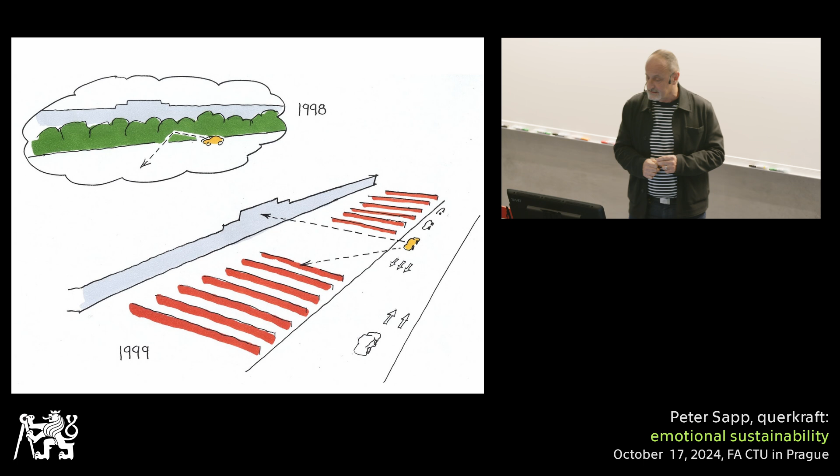At that time the foreground of the Museumsquartier had bushes and trees, and we thought it wasn't a good idea to make a competition for the facade, because no one would see it. So we cut away the bushes and made this little installation of 10,000 square meters, to show that in future it's a good place for different things at the Museumsquartier—exhibitions and all these things. So the Museumsquartier, which is very rigid, can go outside. It was a very cheap and very temporary measure.

In the end, there wasn't enough money to hire a company to remove these things, so we bought orange overalls and carried it away ourselves. That way we got the money for the work—it was better for us. And with this money, we made a big party at the end, called 'Nicht lange Fackeln,' a play on words, because there were 600 torches on sticks. It means 'go for it.'

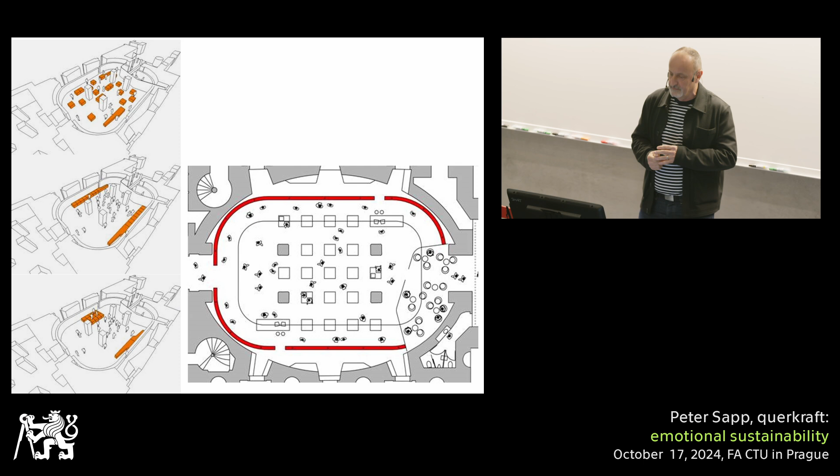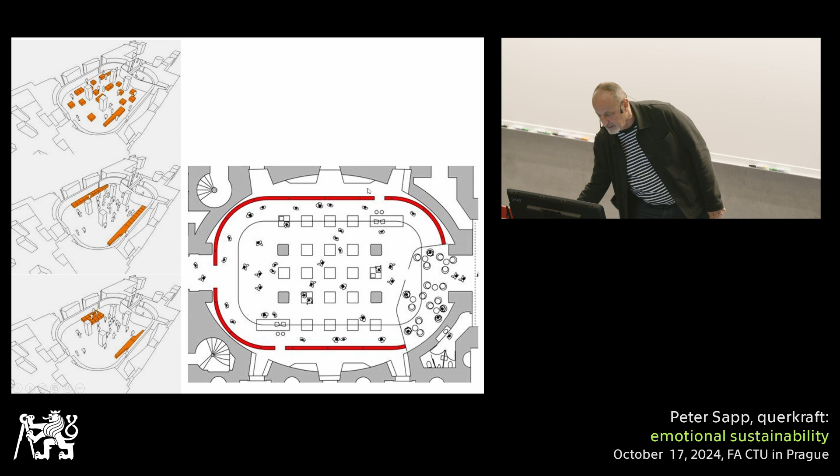The second work was on this part, the so-called Ovalhalle - this was where the emperor's best horses were kept. We made an interior design for a bookshop with movable furniture, and around here we made something like an ice hockey ring consisting of shelves for the books, with storage in the background. We decided to make it with steel shelves using the screw technique to give this golden shining surface, and the books have these different colors too, so there's a little tension between this ice hockey ring of books and the Baroque room. Yeah, these were our little projects from the beginning.

Maybe one example of what we like to do very much is to catch five flies or more with one bat - we try to make one measure for different problems.

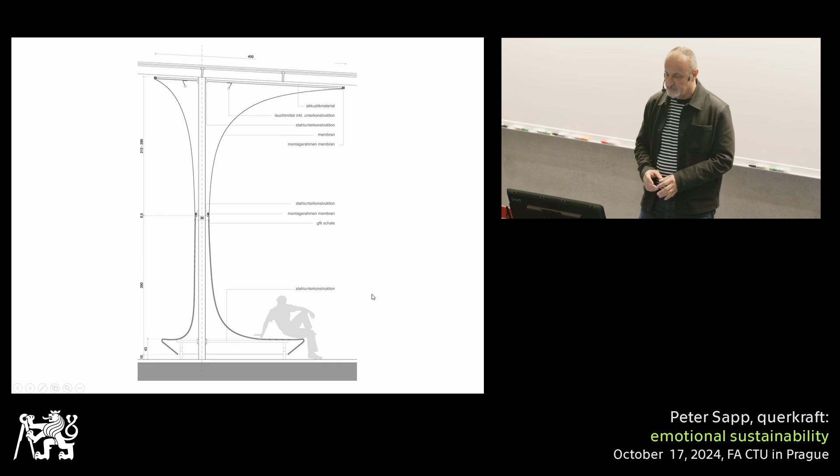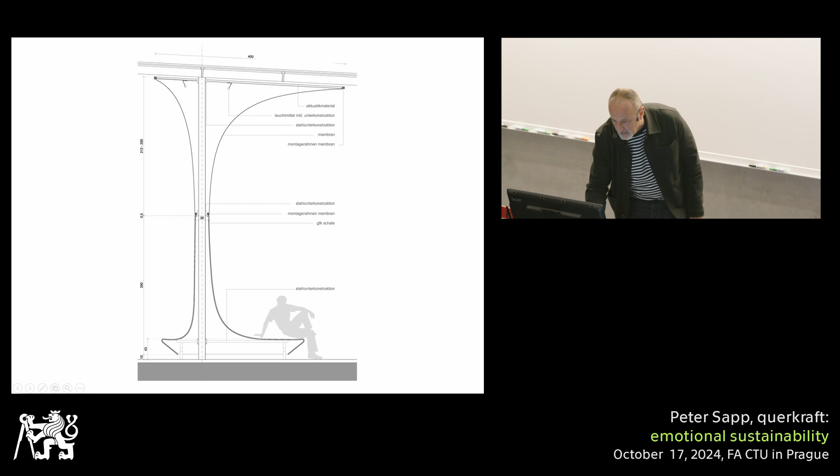This was the entrance hall of the Technical Museum in Vienna, and it didn't work very well because there were many columns, bad acoustics, bad light, no furniture for the visiting children, and the heat of the sun through the glass roof was a problem. What we did was develop something like a big mushroom, which on the bottom is furniture for children to sit. It's made of a material that improves the acoustic quality of the hall, and the surface minimizes the sunlight coming in, with light also implemented here. This form reduces the sunlight, so it's possible to keep the glass roof clear and still see the old historic building.

You see the children use it as furniture to wait and stay. At night, the upper part starts to glow, so it also becomes something like a logo for the museum visible from outside. What I forgot to mention - very important for us - these little parts swallow the pillars that are in the hall, so you only see the mushrooms and not the pillars.

One thing that's very interesting for our thinking about architecture is that when people use it, they always change something, and you see what they are doing. Many architects fight against this, but if somebody wants to change something in his house that is ugly, you cannot do anything against it - it's better to use this energy of the people.

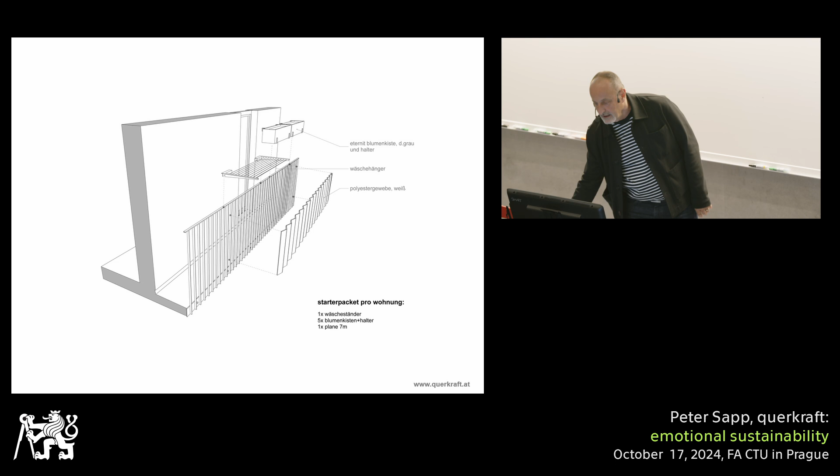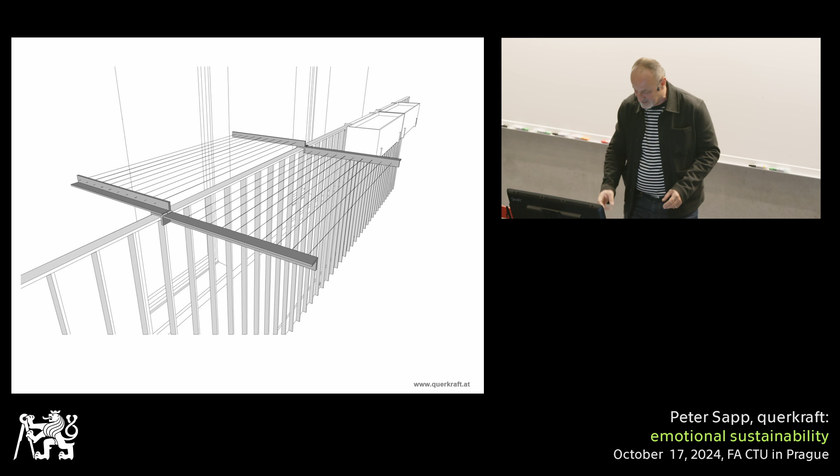We tried to apply this in a social housing project in Vienna. Housing is very important for us because people need space to live, and we think it's interesting to create this. We noticed people hang their things outside on the balcony, so why not start with something like a starter kit for using a housing project - foils that you cannot see through on the balcony, parts for flowers, and a special part for the laundry. It's a funny thing because you can clap it - if you're more extroverted, you put your underwear outside, and if you're more intimate, you clap it inside. It started very simple, and here you see the first steps of creating architecture - yes, now you see underwear can do something for architecture too.

As I said, housing is important for us. One level of housing is when a city develops - there are many places which are socially difficult. One place was on the River Danube, on a very loud street, an existing housing project with 1,000 people living there.

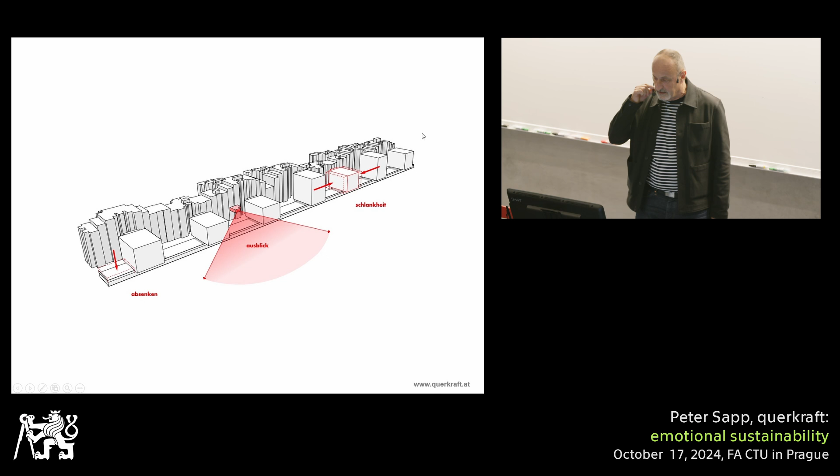It was developed in the 70s, and in front of this building there was a 430 meter long garage building, and this building was really broken down and rotten. This space between was also really difficult, a socially difficult space. People didn't like to go there at night.

The city had the idea to make a new garage for these people, and the financial possibility to do this was the idea to create new living space. The problem was that we had to fit 20,000 square meters of living space in the competition, in front of an existing building where people see a big river every day.

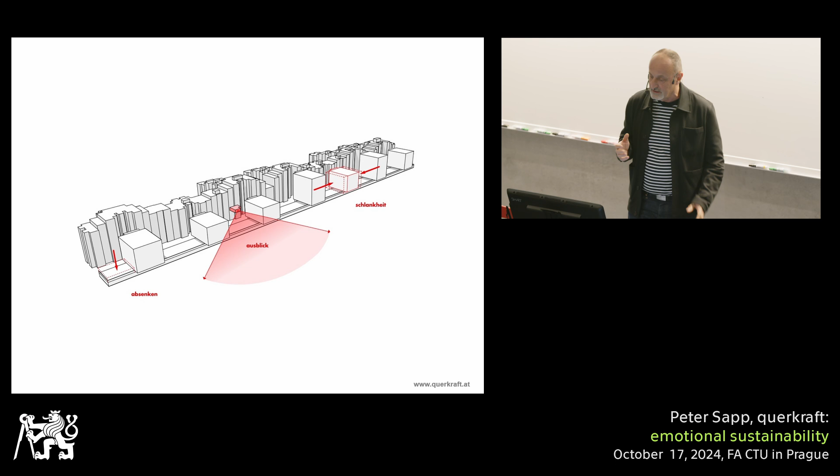So one of our tasks was to divide this mass into seven cubes, and to make these cubes as slim as possible, because they could deliver here 7 meters over this new garage building.

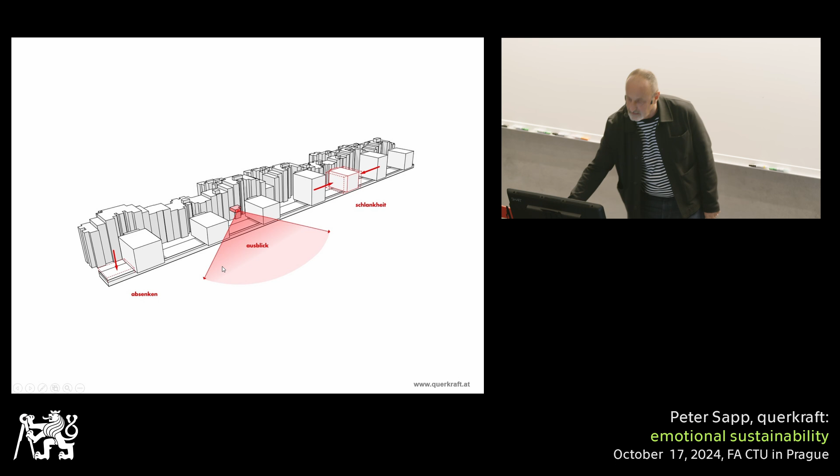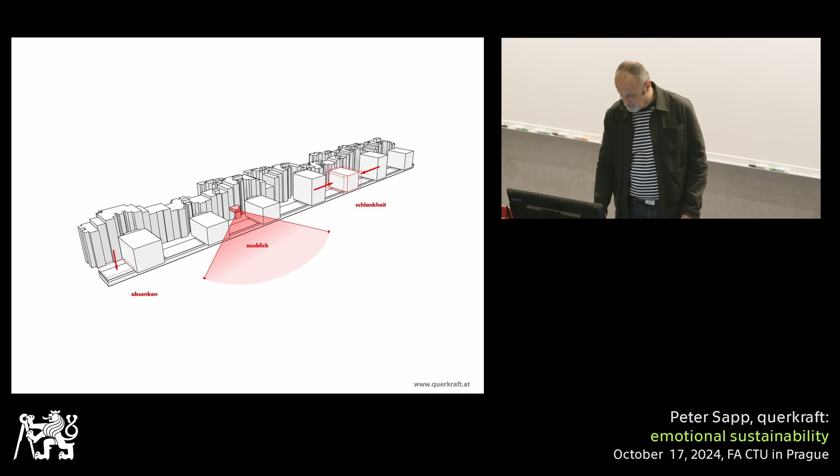The aim was that these flats have their view to the Danube undisturbed. And on top of this garage, there is a 430 meter long garden deck with different social functions, open functions.

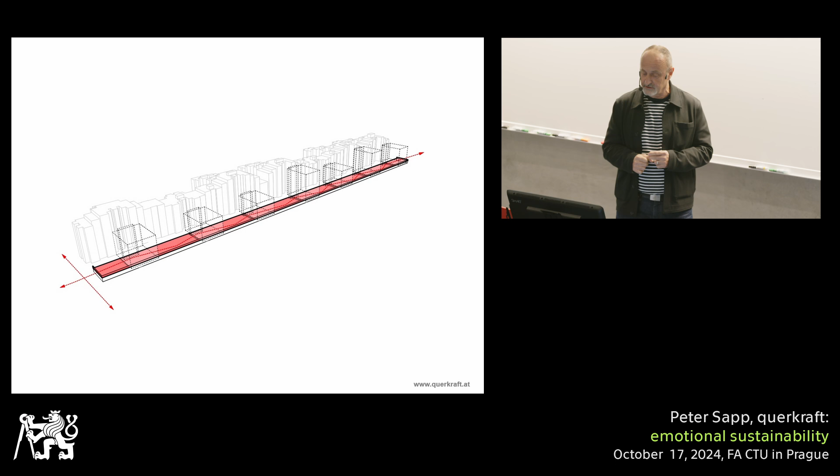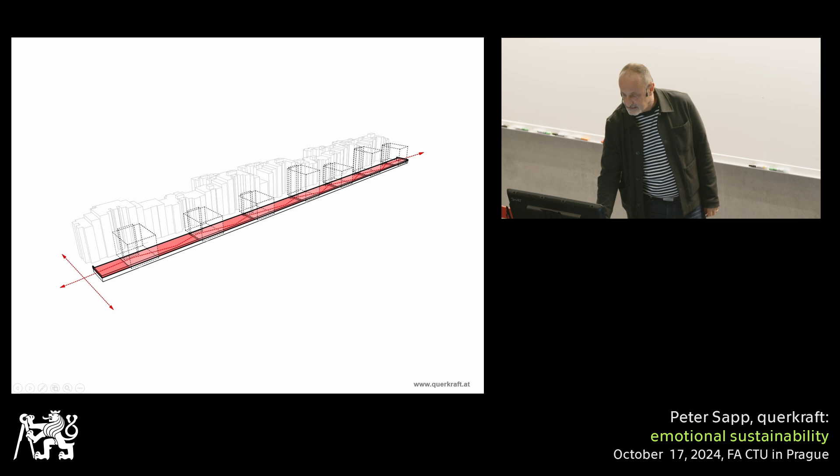It's connected also with a bridge to the river shore. This is a measure which is not only for the new inhabitants here, but also for the people who live in the existing building.

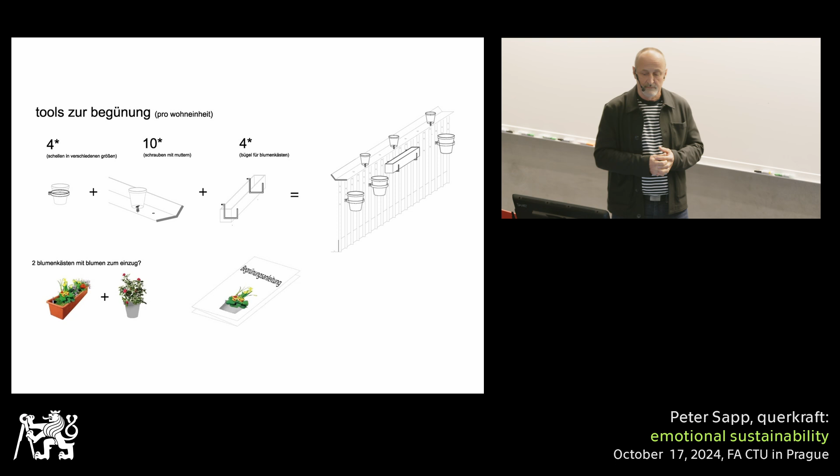What we also like to do is help people start planting things on the balconies. So we make tools for them to show them how they can plant things, and so we use their energy to make the buildings more green.

One project which is very important for our office is more a land art project than architecture. It's in Carinthia, in the southeast of Austria, really far away from the next bigger town, and that was a competition for the most important art collector in Austria.

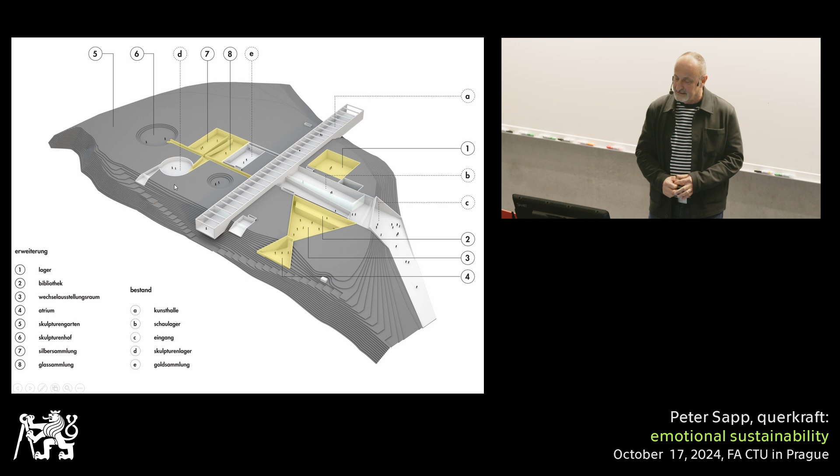The first step is here the sculpture deposit. This is a quite funny thing because Mr. Liaunig wanted to have a deposit for the packed sculptures and also for his tractor for the site.

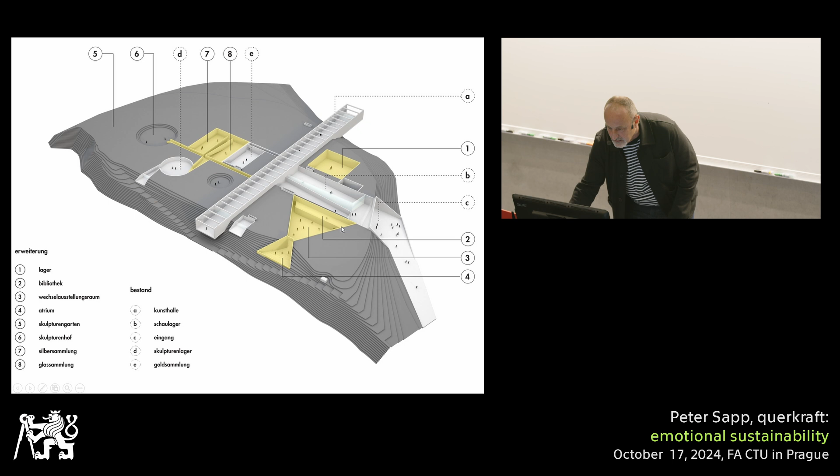There was no money to do it, so I will tell later maybe how we constructed it. But the topic is that later he wanted to connect it with the museum, so we also added this gangway, a silver and glass connection space, a new sculpture deposit, and an exhibition space for changing exhibitions.

You see here the museum lies in the landscape like a silver needle. And when you come here on the street, it's quite an expressive building because it cantilevers 33 meters.

It's a bridge construction which holds this in place, and the covering is a very simple industrial roof. The reason is because it's a very cheap museum - the collector wants to spend the money on the art and not so much on the architecture. So we built this museum for the square meter price like social housing. It was really hard for us.

When you enter the museum, you see on the left side the reception, and on the right side this art deposit where the pictures are hanging, and the curators can pull it out, look at it, and decide what they will choose for the next exhibition. We did this because in an exhibition maybe there are 200 or maximum 300 artworks hanging, but the collector has 3,000 or more. So when you enter, you feel it's so much like a treasury - so much more here than you see on the walls.

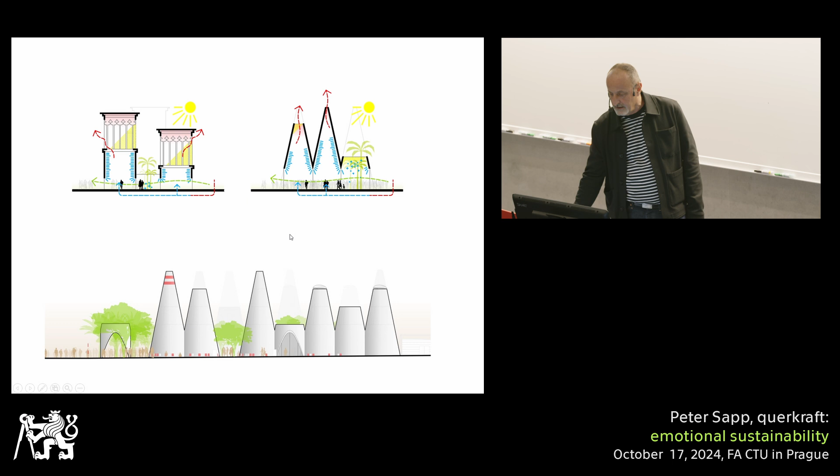We have clay on the wall, and these thermic flows - we close these cones in the day, open them in the night, and the air flows through, so we could avoid the coolings.

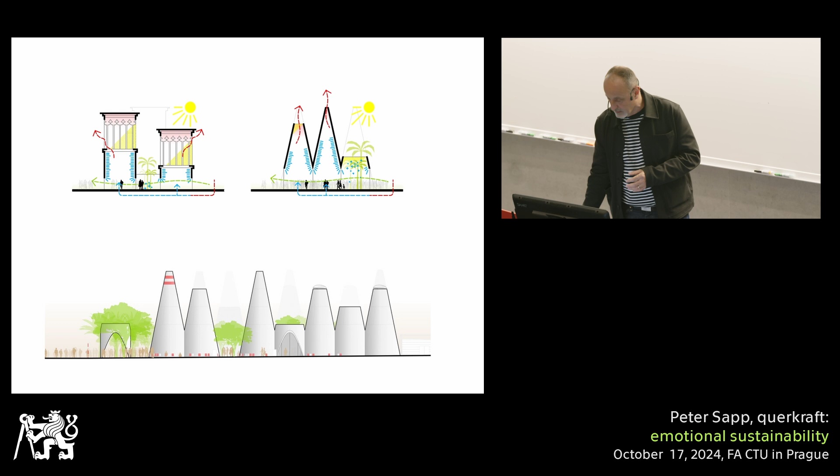And the forms are quite simple. It's a simple cone, and when you add these cones, then they meet in one point, and this point is something like a column which reaches the ground, and it depends how you cut these cones together. Then there remains walls which reach the ground, and then you can create room.

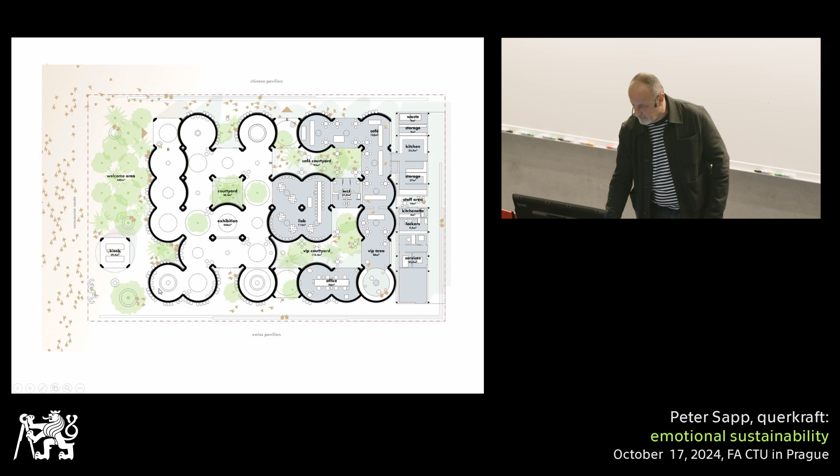And the next thing is that we cut these cones in different heights so that it's more lively. So the Austrian pavilion is an addition of these cones, and there are some green courtyards, and we had no cooling necessary for that. So you see it here all together.

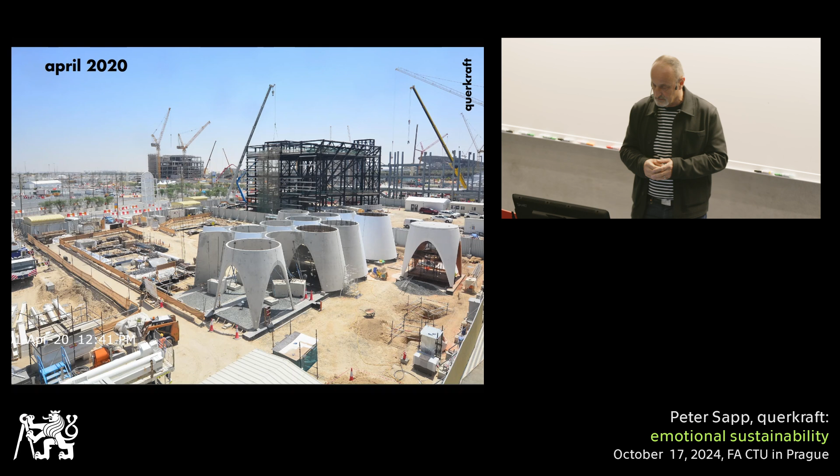We used, because it was the only possibility here in Dubai, prefabricated concrete slim parts which we could collect together and which are possible to use in another place, because you can reassemble it. And then these parts were covered with clay, and the addition was this sculptural pavilion.

The theme was to work with the senses, and so you see here the clay on the wall, and you must imagine that outside it's very, very hot. People rushing through the expo from one pavilion to the next, which is very cold inside, and you have a flooding of light and content. And so we wanted to bring them down and to have only these different senses.

For the smell, this is zirbe, a wood which smells very strong, and there is this different light and shadow, and also the surface and the greens, the trees. And so the people, and also the locals, they liked it because it reminds them of their history. And we like this sculptural, playful thing.

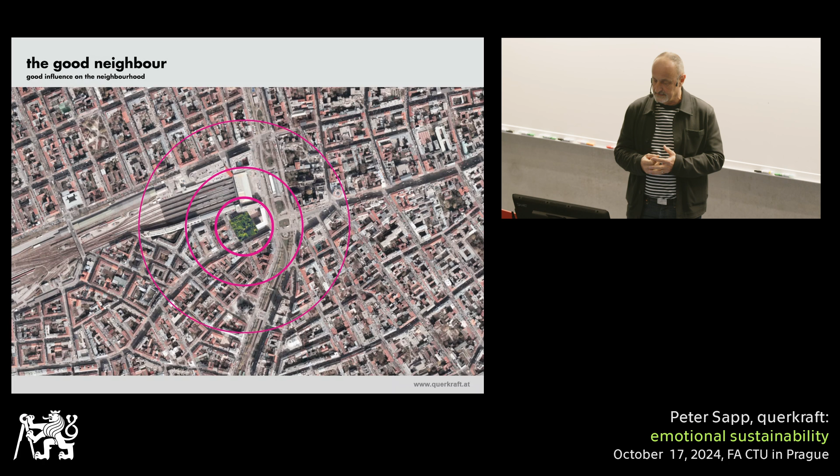And in the competition, IKEA told us they want to be a good neighbor. And so we thought about what we can do to be a good neighbor here. And we thought maybe it's a good idea to bring a dense green here on the site and to influence the site in this way. And what we did is we covered the program of storage, shopping, restaurant, hotel with a big grid of metal construction, and we enriched this grid with 160 trees on the building.

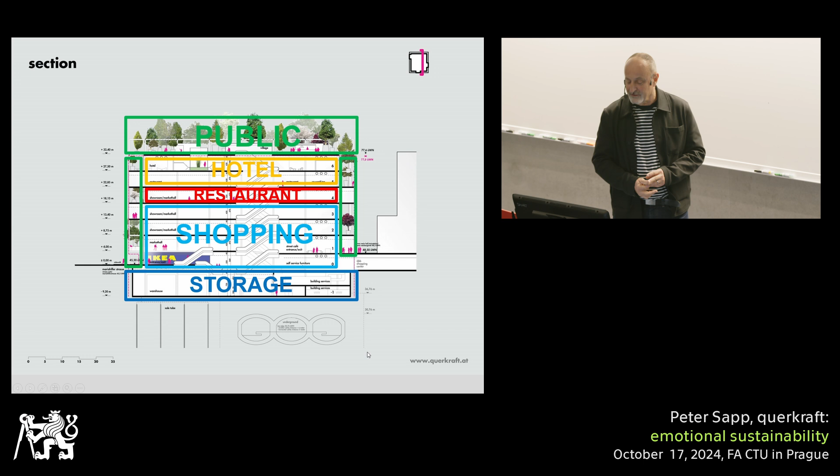On this section, you can also see the Viennese underground, and this was really a difficult building site because there was another building existing here, and when we removed it, we had to be very careful that when we removed the load of the old building, the underground, which is in the groundwater, doesn't float up. So 6 centimeters was allowed, and it was in the end 4 centimeters, so it was okay.

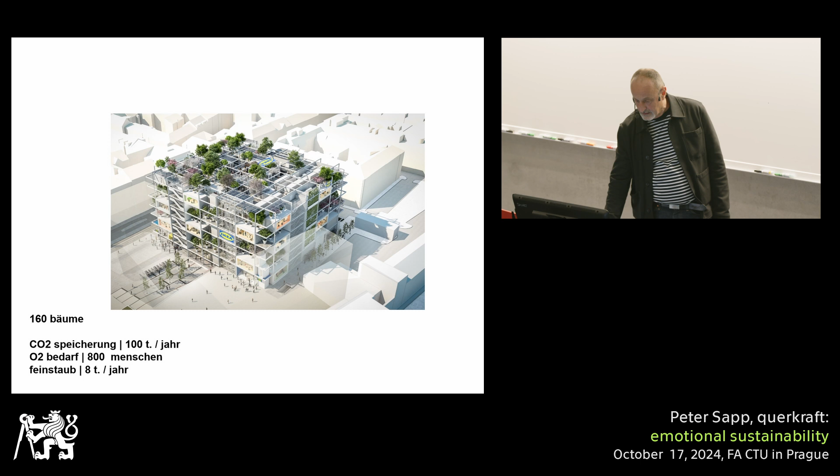And here you see this metal grid with the 160 trees, and they store 100 tons of CO2 a year. And for us also a very important effect is that it cools down the surroundings, the near surroundings, by 1.5 degrees.

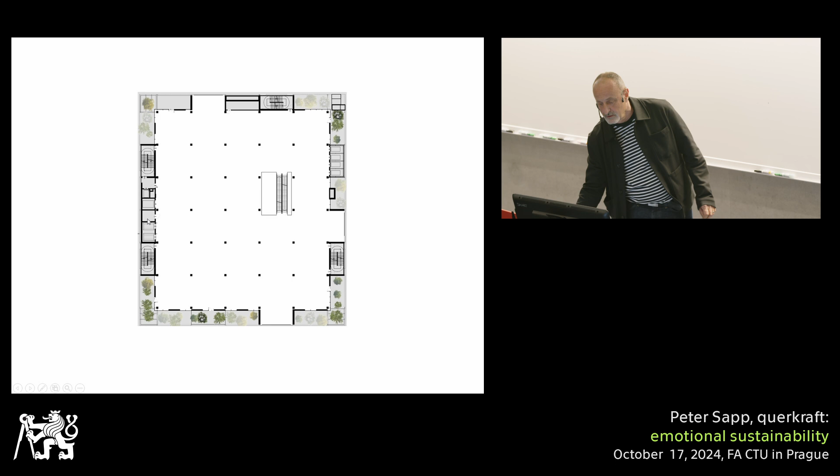And here you see the grid, which consists of the parts where the trees are, terraces, and these add-ons where the inner space looks outside. Here you see the ground floor, which is really free and programmable, and these add-ons which come out and look into the town. And all the technical stuff, elevators, staircases, and so on, is located in the grid, and also the greenery, the trees.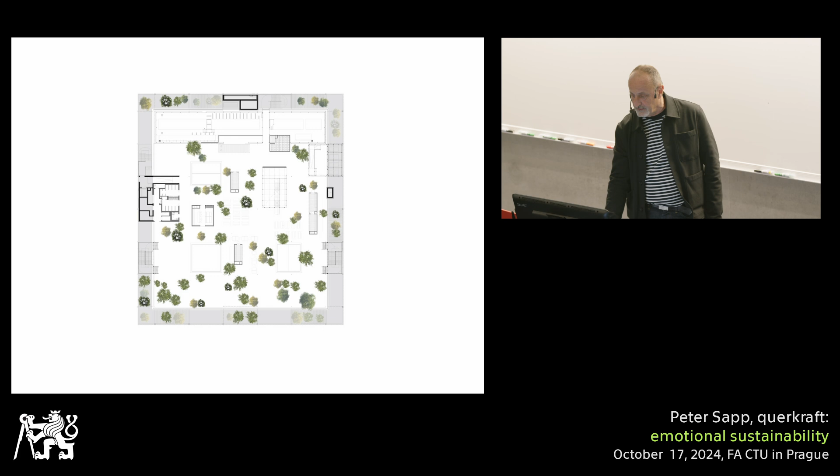And the upper 2 floors is a hotel, and the hotel has these atriums for the light. And we chose the trees so that over the year they have an interesting appearance.

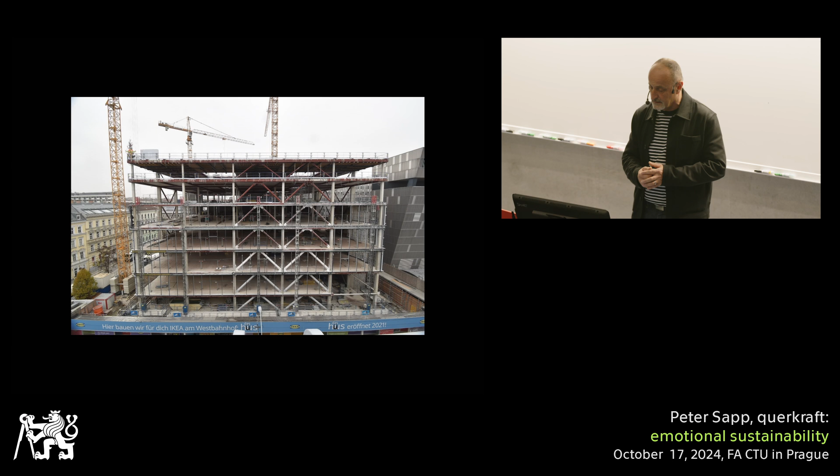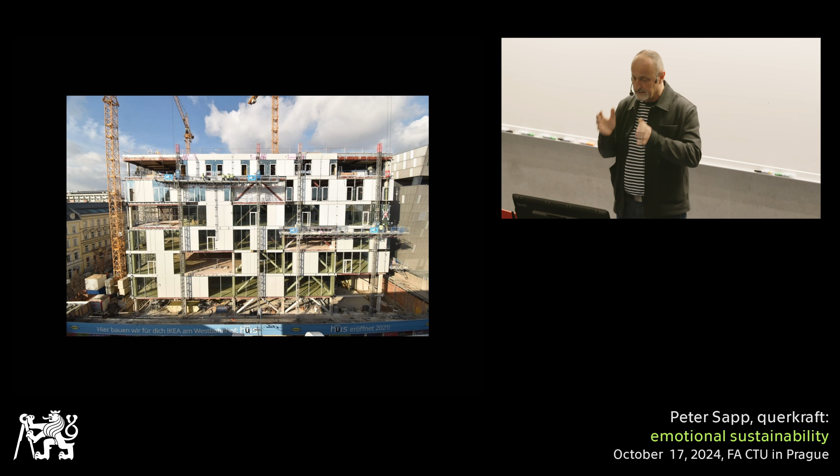The construction is very simple. It's a hybrid construction of steel and concrete, and it's covered with panels, metal panels, and glass. So it was very easy to have different openings to the outside. And here you see this expressive appearance we like in this quite gray and rigid surrounding.

It lies here on the outer Mariahilfer Straße, and there is a railway station here. And so in the competition, they wanted us to have a 4-meter arcade here, so that people have more space. But in our building, it's 30 meters. It's open, and there are only these trees and these little places, terraces, where you can get out and use this space, and also here in front of the restaurant.

And in the upper two floors, there is JO&JOE. It's a youth hostel organization which fits very well with IKEA.

And here's the inner void where the light from above comes down, and there is a free stairway where you can go up to the public terrace. This was one important point from the government of Vienna. They allowed IKEA to make a shopping center on this place, but they said you have to give the public your roof. That's why it's open and everyone can go there, and you don't have to buy something. You can bring your food and look over Vienna.

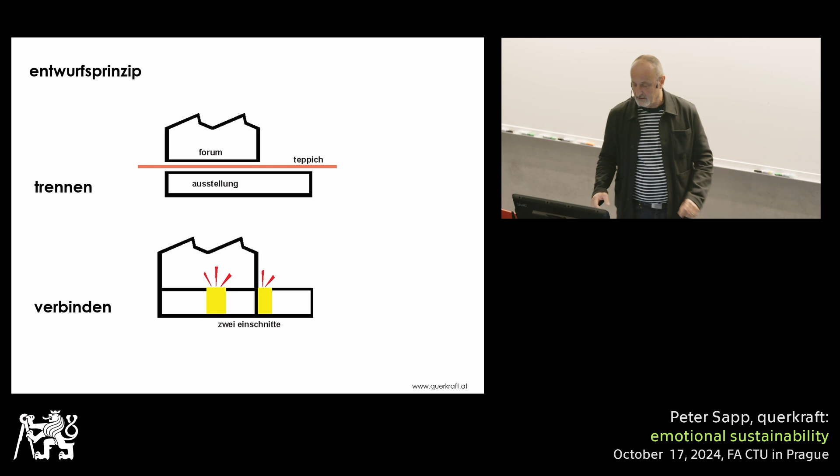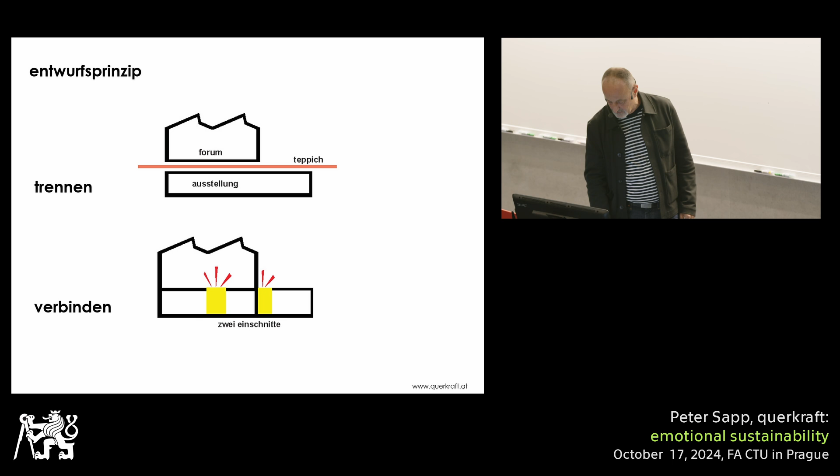You see here the section: on the ground floor, the hall. In the middle, there is this crane track where they pulled the cannons, and this crane track also carries the roof. Here we have some other functions, the pedagogic space and office and kitchen and so on, and the exhibition space here in the ground, connected with this cut.

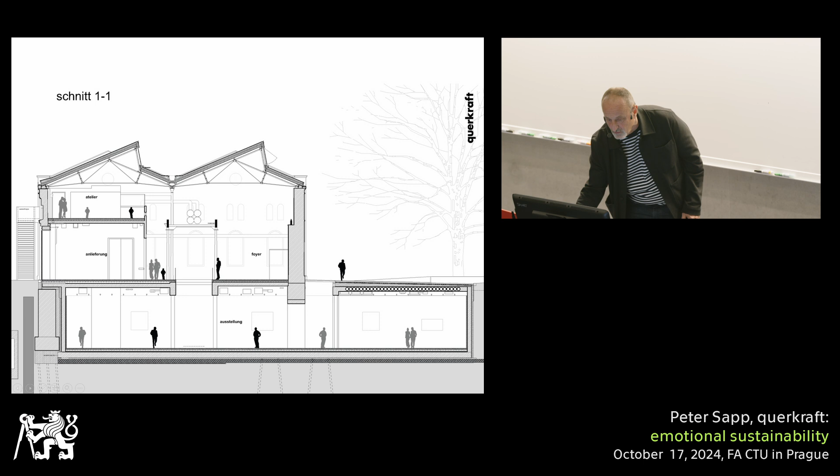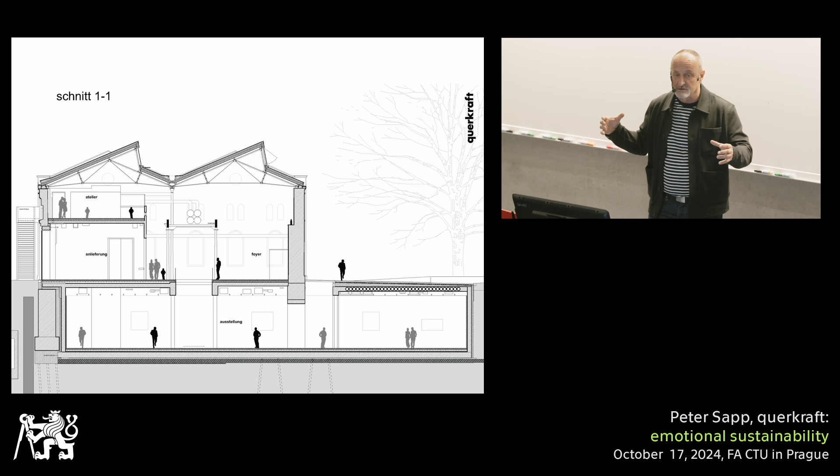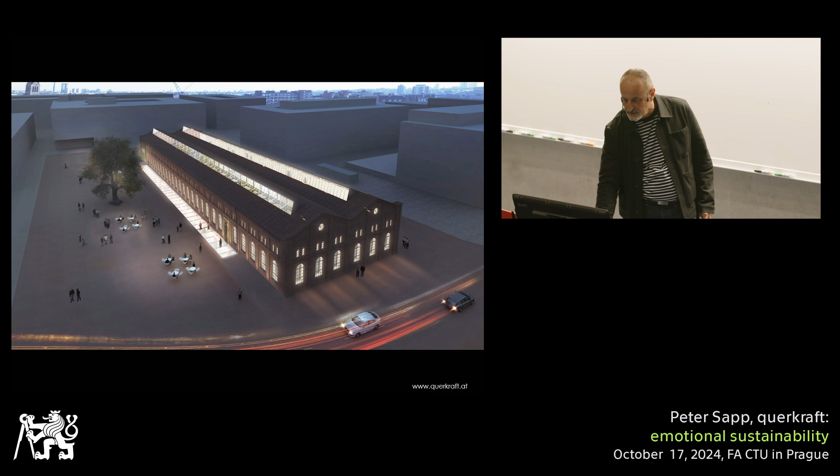What we also see is these historic walls—they have foundations deep in the ground. So when we put this exhibition space in the ground, we wanted to see these foundations. In the competition, it was a very simple picture with this shed hall and this cut. And you see here this foundation in the ground.

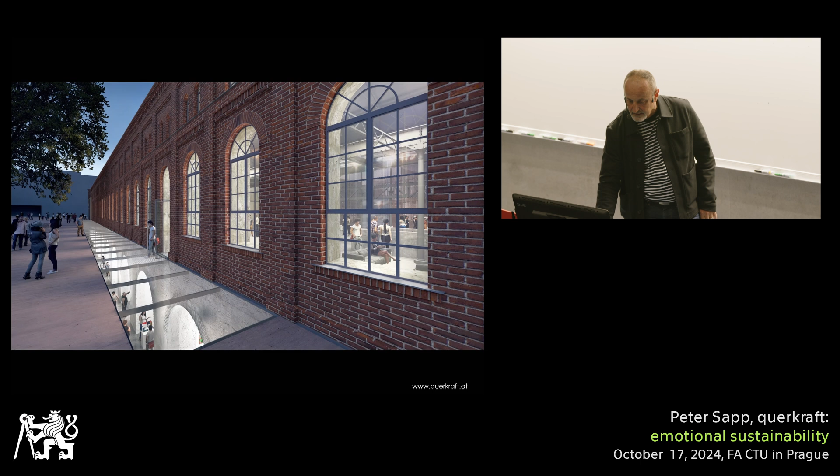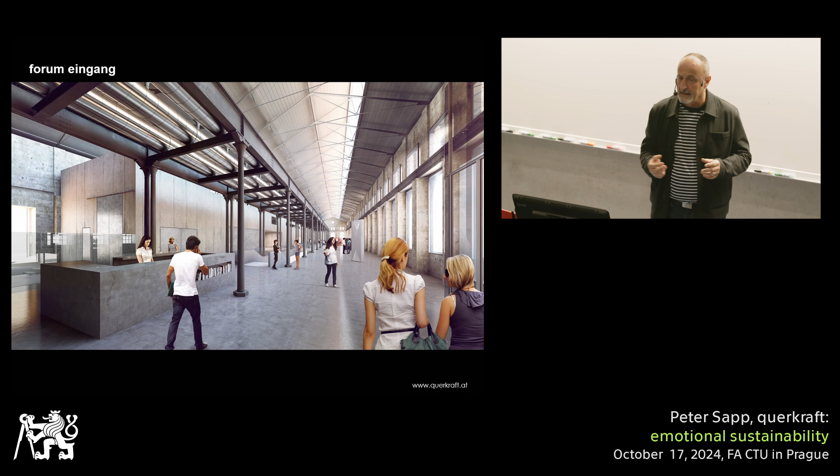When you enter the hall, here is the reception and different functions, the office, and at the end the restaurant. And here there is space for maybe design or something which doesn't have such high conservation regulations. What was very important for us was this connection, this cut between these two different spaces of the hall and the museum.

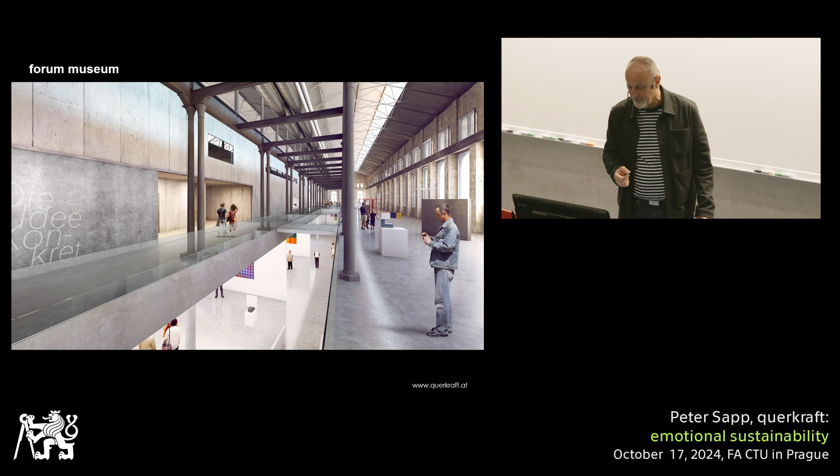It's also important for us because on the other side there is a school, and we thought that people, the kids, can go in and look at the art without paying a ticket, and maybe they will get interested in the future.

Then after four years of struggling with the city and with all these different levels, we started the building process. We found the hall, and we had to dig down a little bit at first to find these foundations of machines and also of this crane track. All this was guided by archaeologists, so they had to be very careful to cut out every stone to find something, which meant it lasted a very long time.

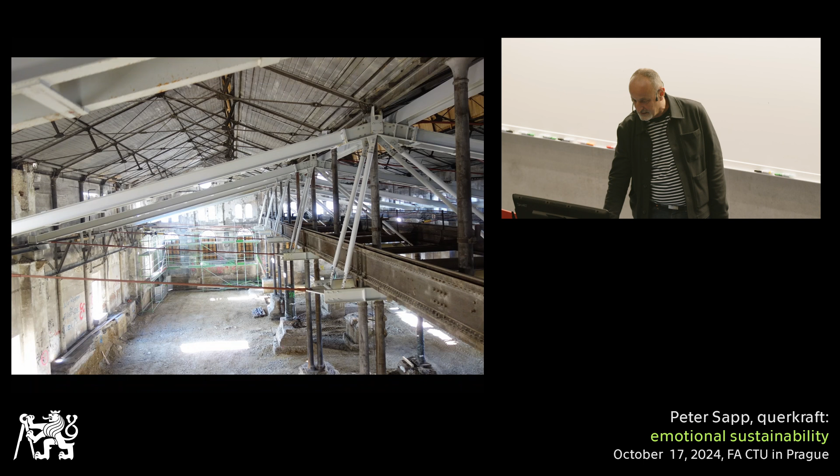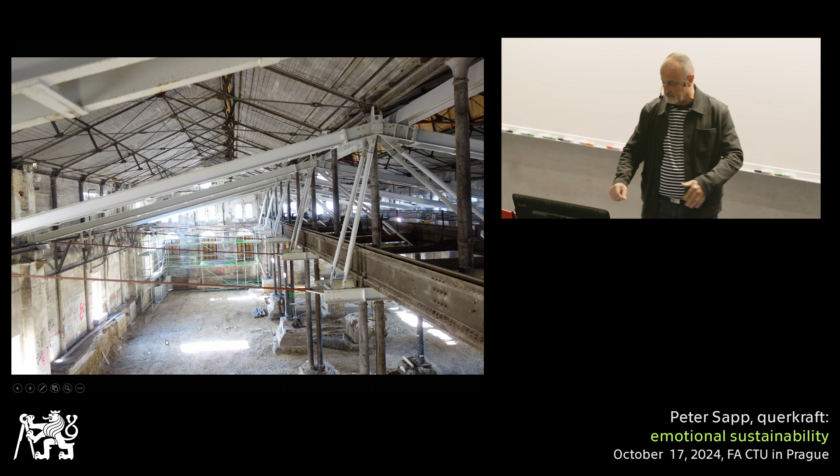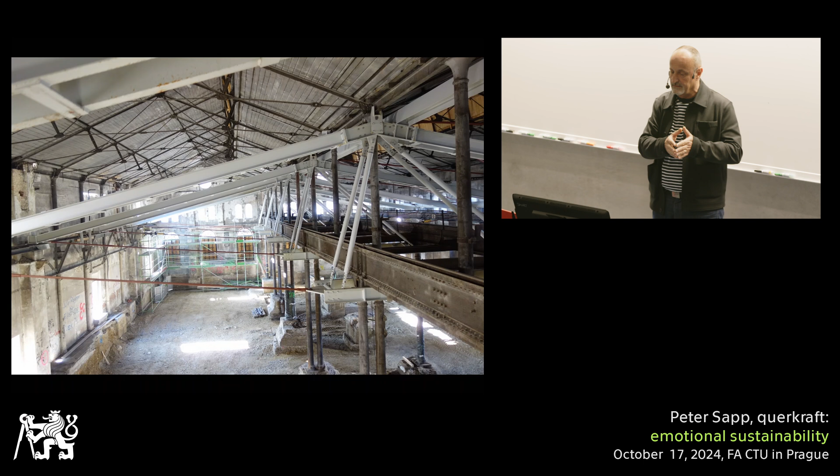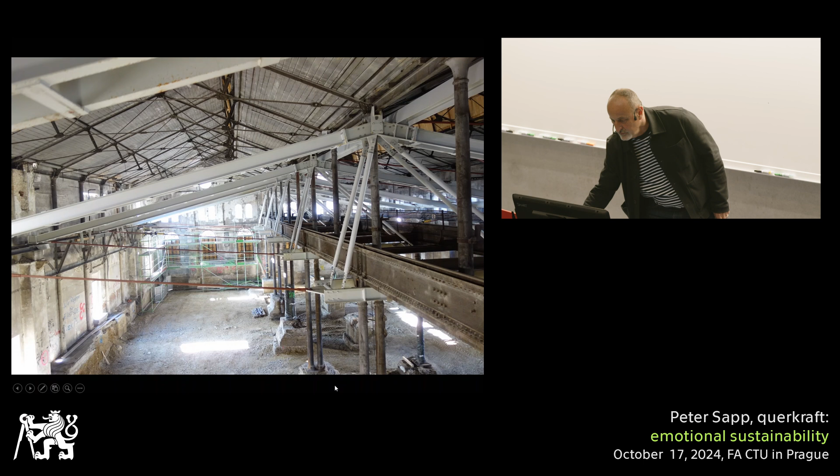After that, we reached a depth of maybe 80 centimeters, and after this time we covered all this what we dug out with some stones. One reason was because we put here a temporary steel construction which reaches from one outside wall of the hall to the other for 25 meters, and this steel construction has to hold the crane track, and therefore also the roof, because we had to remove the steel pillars to go deeper into the ground.

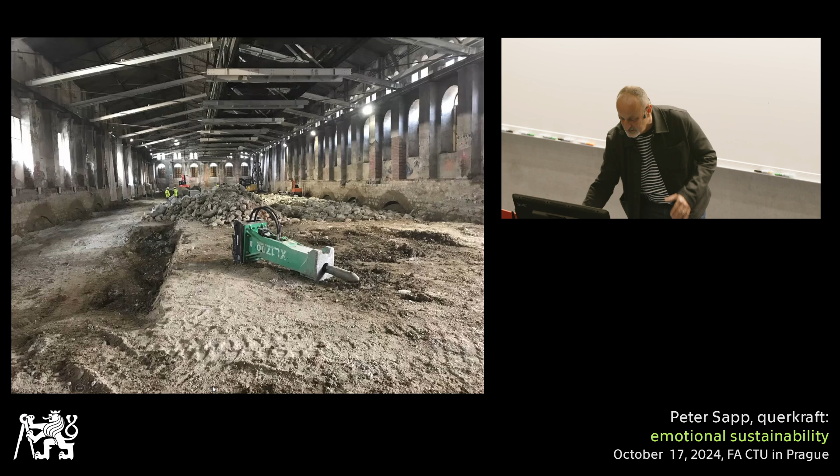So you see here this temporary construction over the hole, and these steel pillars are removed here. And then we started to go deeper again. This was possible 4 meters below ground without any additional foundation measure. This was a very long process because there were many crane foundations on this place.

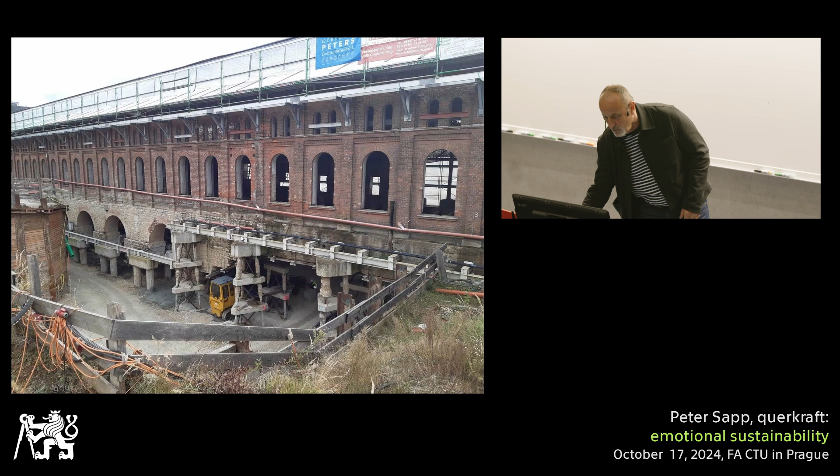And then on this point, we started to make the foundations. These foundations are these micro piles and these big concrete piles, which carry a steel construction with needles drilled through the wall. These micro piles carried the whole load of this outside wall and also of the roof. So you see here the steel construction and the foundation.

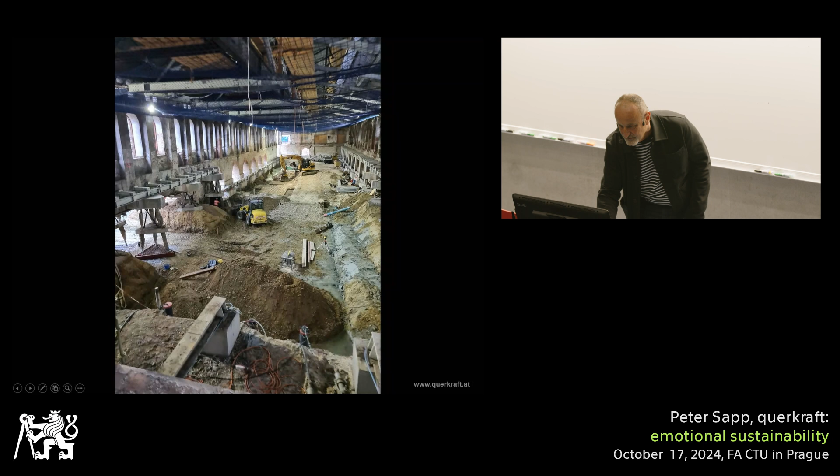Yeah, and then it was possible to go 3 meters further deeper. And in that time, you must know that the whole hall is hovering only on these iron piles. And then again, we find also in very deep these machine foundations.

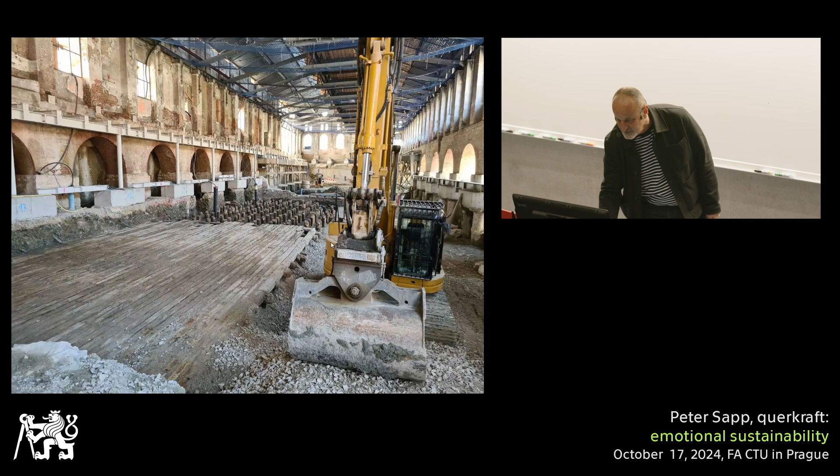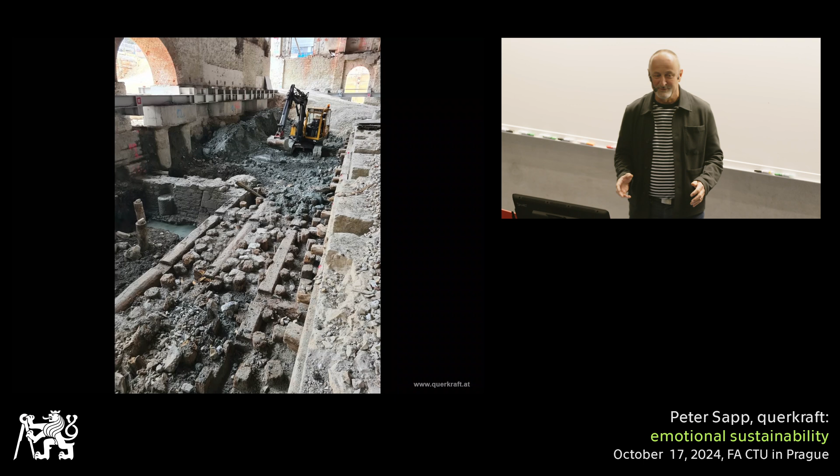And these machine foundations, they're laid on this wooden surface, which is like a dance floor, and this wood lies on hundreds of oak piles in the ground. So all these things we had to remove.

And what we can see here also is that through the hall, the Renaissance fortress of Ingolstadt, the foundation of the Renaissance fortress, goes diametral through the hall, and also this was necessary to be removed.

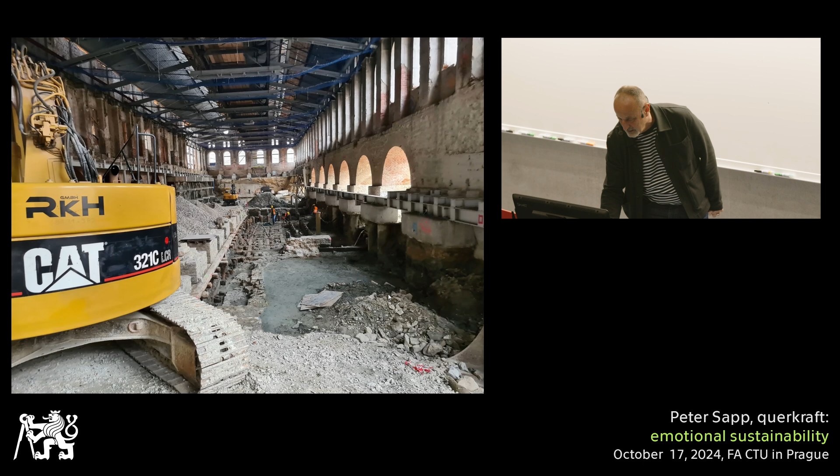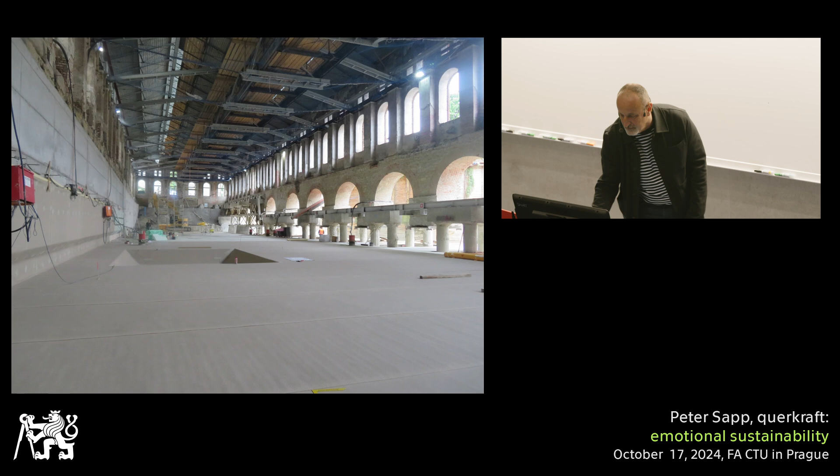Yeah, you see here the foundations, the old one, and here the new piles. And then we reached the right level, and we could cover the ground with a foil. It was for us really a very emotional moment to have the first slab on the ground, and then we know it goes up again.

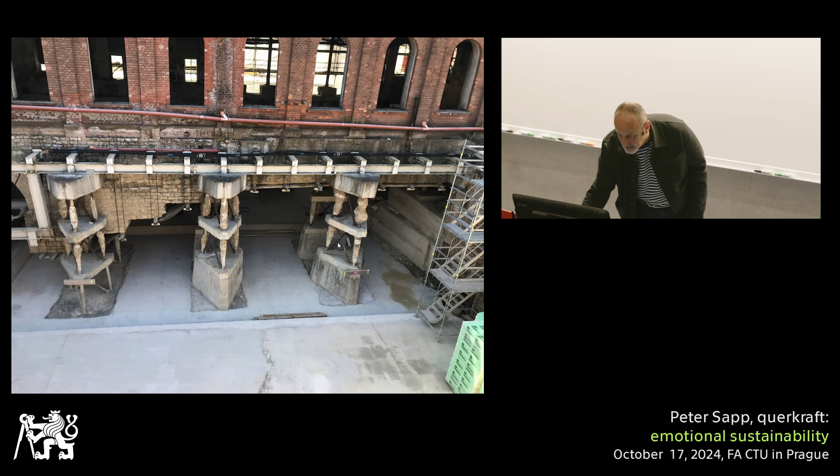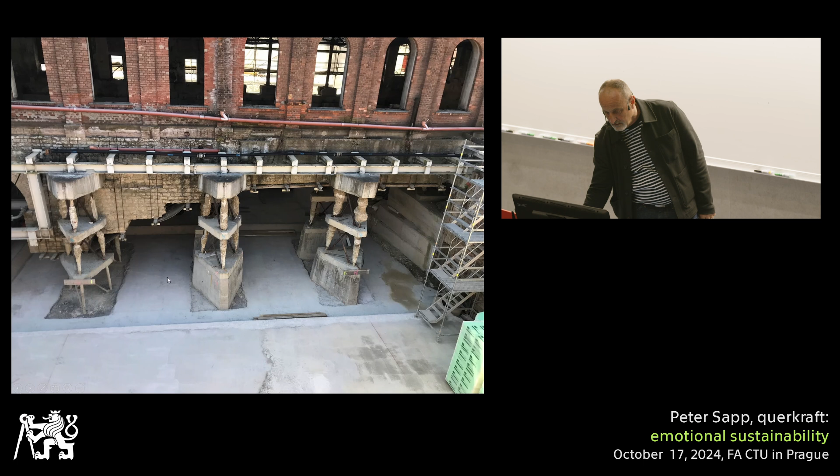Here the first walls, and then you see between these foundations the floor comes out, and so we needed to bring the loads of the wall onto the new floor. This was the next step. You see also here the floor goes here, and in this picture it's not yet connected.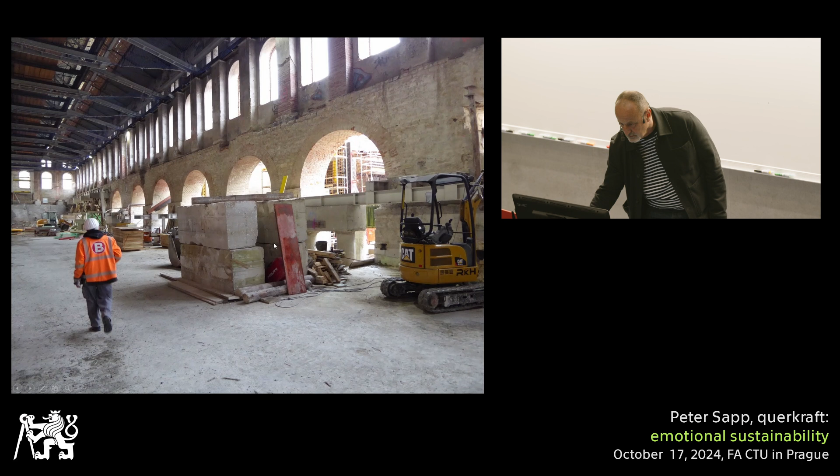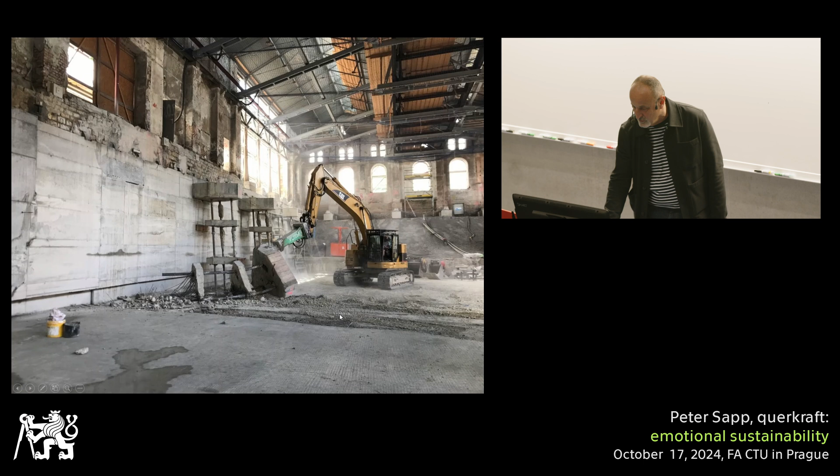So this had to be filled with concrete, and then we could remove this foundation construction. Here are the first blocks we cut, and you see all these micropiles have been removed. And then we cut this steel construction.

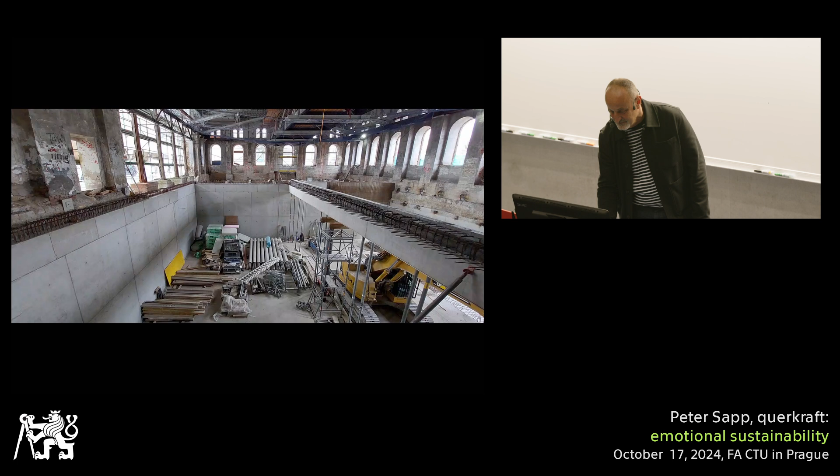And then it goes up with the scaffolding. And yeah, these are the slabs of the ground floor. Now we are again on the floor we started.

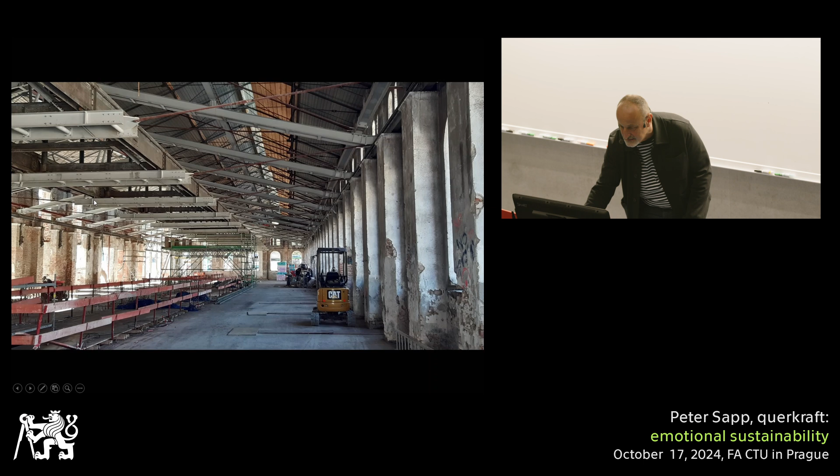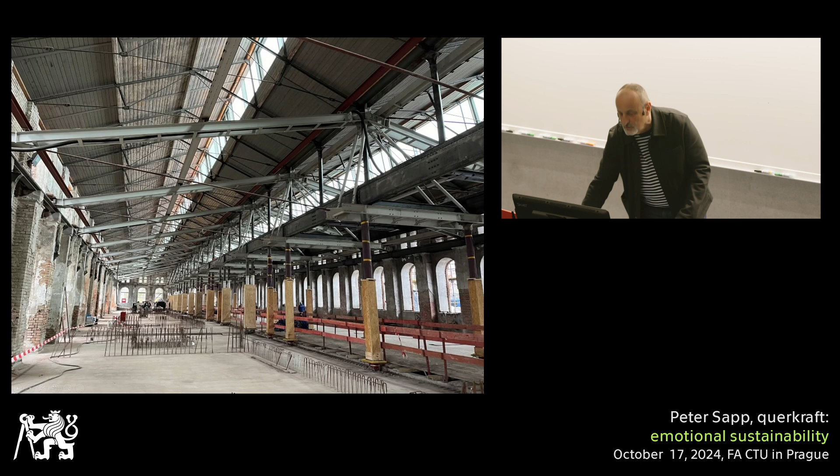And you see here again the crane track with this temporary construction. And on the next picture, you see the piles are here also on their original place. And so we could pull the loads again onto these piles and remove the construction, and now it stands here as it was before.

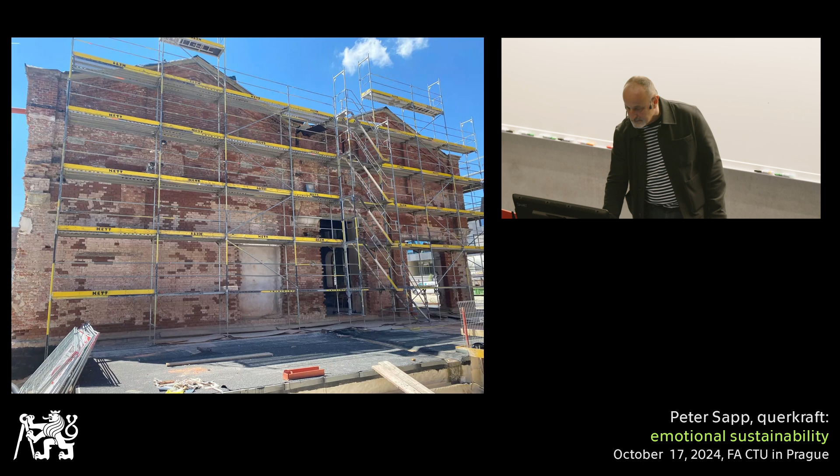Yeah, and you see it's much work to do. Outside also we had to do many different measures, and in the exhibition hall it's full of these temporary piles which are necessary for the construction on the first floor.